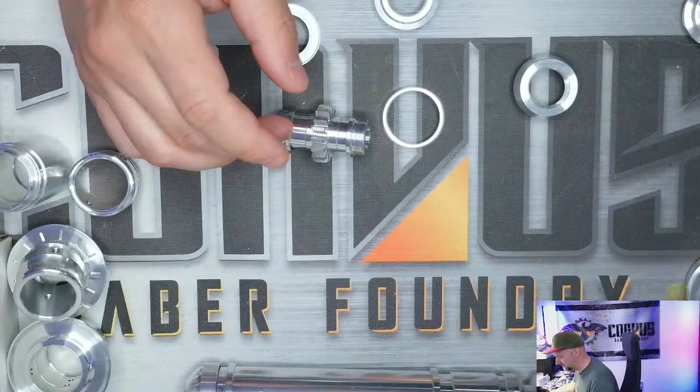So we got 5 new parts arriving in the next week or so that I talked about, and those parts are the wind vane insert. Gosh, I had a brain fart there, stop thinking for a second.

So just like all of the other thin neck inserts that we have, typical threading is about 6 millimeters, which is quite a bit more than competition at this point. It has this nice little torque chamfer, so it'll lock into place once you get it into the piece or into the item that you need it to be locked into.

And so the cool part that I really like about these wind vanes is that you can swap out the outer ring on the wind vane. I don't think there's a wind vane thin neck anywhere on the market right now that allows you to do this, unless you do something with the original and replace the actual wind vane cover itself, which is basically just a press fit item on this.

So if you don't know what this part is or what it's about, let me show you. Back in the day, I think World War One, potentially maybe even World War II, I'm not exactly sure, this part belonged to what's called a rifle grenade, and it fit on that part like this, then linked into this, and that fit on the back end of your grenade body piece basically.

And if you don't know why it's called a wind vane, it's because it actually was used to fin stabilize that grenade in flight. It actually put a spin on it. The wind vanes were tilted a little bit, so they put a spin on the grenade in flight so that it would stay stable and land on the target.

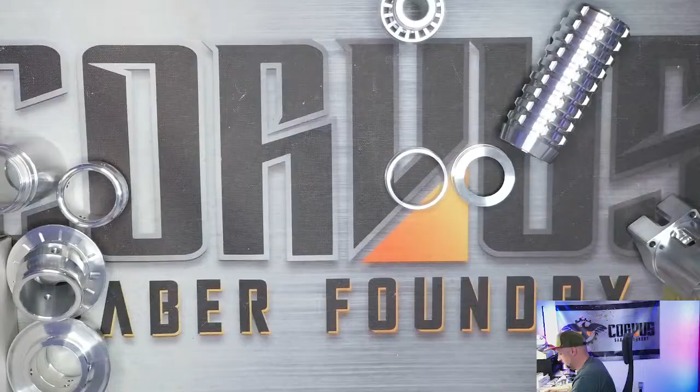I happen to have a body here that was building a sample for another customer with, and so what I'll do is I'll just put these pieces together here really quick and show you what I'm talking about, so you can get an idea. And I really like this Obi-Wan Kenobi base. It's one of my favorite parts because you can use it on both ends.

I don't have a second one to show you, so you'd have to imagine it. But if you wanted to put an Obi-Wan Kenobi base on the end of both ends of one of these, I don't think that it would look that bad. Let me get this locked in here really quick, so there's a decent look at it. Let me move these out of the way. If I can get it to focus, there it goes. I guess kind of focusing. But you can get your Obi-Wan Kenobi top and bottom.

It fits just like all the other ones. So we'll throw one on here. We'll put together really quick. I guess we can throw together something really quick. This isn't going to be the right size or shape probably, but you know what, let me swap this over. Let me change this from a female to a male end here, and we'll off to the races there.

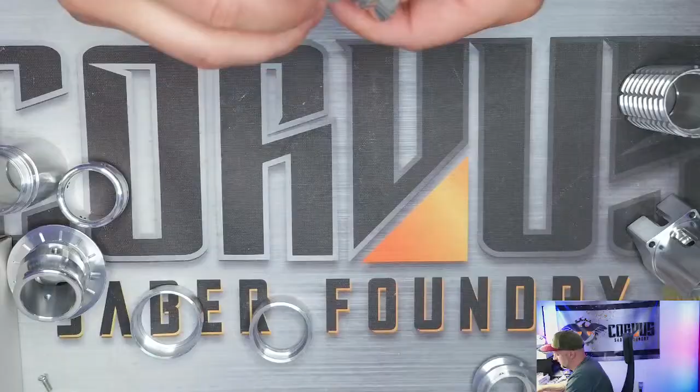I like that the other way around. So it wasn't supposed to be a let's build, it's supposed to be a let me show you my stuff and talk about these other things. But here, there we go. That looks pretty good.

If I could get the threads to start, golly. Ooh, little squeakiness there. There it is. Little decent example there with a thin neck on it. Pretty happy with that. And to show you that the shrouding works as it should. There you go.

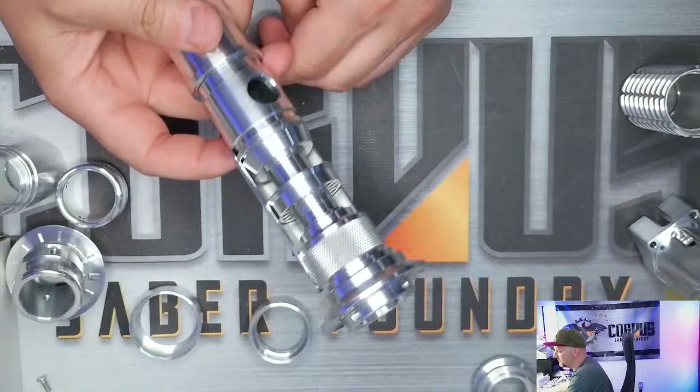I don't know how you would attach this now at this point, but if you were to glue it in or do something along those lines, that'd probably be the best case scenario in this situation. But you can put a shroud over top of the thin neck if you want to. You just have to figure out how to anchor it somewhere. So there's that. Not too shabby. I'm pretty proud of this one. I think that it's going to do a lot.

If you are inclined to keep this in a certain configuration, so if you buy one of these and you want to keep this ring in here, when you're torquing this thing around, it might cinch it down really tight or loosen it up while you're doing work with it. You could put a little dot of blue Loctite, the lowest level, on one of these threads, and just give it a little snug so that it locks in, and let it sit for like an hour so that it would lock up. And that way you won't loosen this up at all.

In order to remove that or get that off, you would have to heat it up just a little bit with something like a hair dryer. I've done this in the past, used a hair dryer before to heat up stuck parts and get them off. It works okay, not too bad.

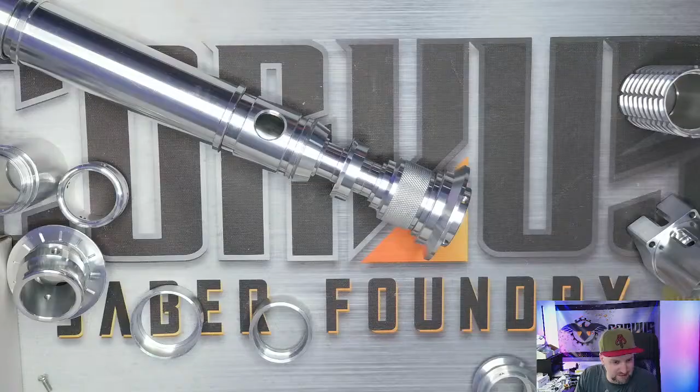I don't see any commentary or questions. I do see 2 people viewing. So hey, thank you for joining me and welcome, I appreciate your time and your energy in the chat. Oh, I saw a love and a heart. Oh, I love you guys too. Woo.

Cool, alright, let's talk about other things. Let me swipe this to the other place. Let's see, which way is it going to go? Is it this way or this way? I don't know. Yep, there you go. There's a swipe, alright.

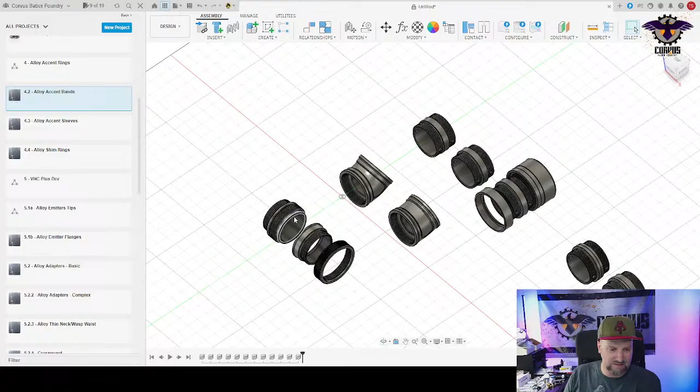We're in Autodesk now, we're going to talk about Fusion 360 and the stuff that we're talking about here. Along with the Wind Vane - oh there he is - and besides the Wind Vanes, we got this part coming here, and this part here is the infinite adapter.

If you haven't heard me talk about this, I feel like you should have at this point because I've been saying a lot about it. One of the things that's been plaguing us as builders in VHC is being stuck having to clock our parts with threads that feel like they're a mile long - like 14 turns, right? If you turn half a turn with a hand, it's like 14 turns. It might not be that many, it's like 10 or 12 maybe, but it's a lot of threads.

I'm sorry John, I saw you said the thin neck build is awesome, I appreciate that. But the threads on all of these parts - this thread up here is like 7 millimeters or 6 millimeters of thread that you have to get through. And the part only moves like 1 millimeter in for every turn. So a 29 by 1 thread pitch means it's taking its time moving in, and it takes forever to get in there. It's something that's been bothering us, plaguing us for a long time.

Most people, when they need to clock something, either use timing shims, which is cool, but those things suck. The other option is to shave your parts down - sometimes you only need a fraction of a turn, so you have to lap your parts in a figure 8 on sandpaper to reduce the threading on both ends. That is not a perfect science, it's not precise, it's honestly kind of frustrating and irritating to have to do that.

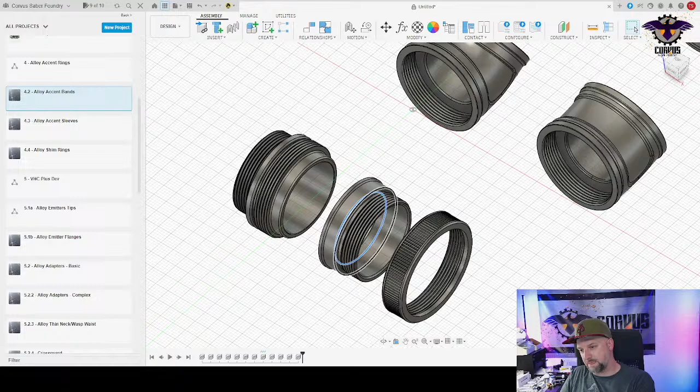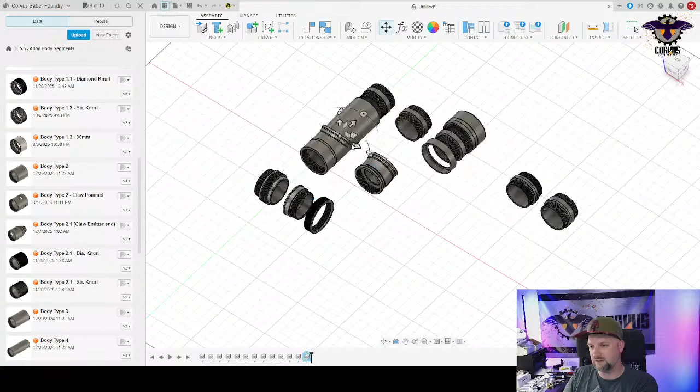So, infinite adapter. Let's talk about it. I don't know that many people really know how this is supposed to work, or what it is. I've talked to people who say they have to see it in use to make sure they understand it. So I'm going to do a quick demonstration of what this is supposed to be, and I'll leave it to you guys to pass judgment on what you think it's going to be like. I've got to grab a part out here really fast.

I think it's important to show it like this. Normally I have my parts oriented on this east to west register. I'm changing it to east to west with a southwest point, to hopefully shed light on the shape and how this is supposed to work.

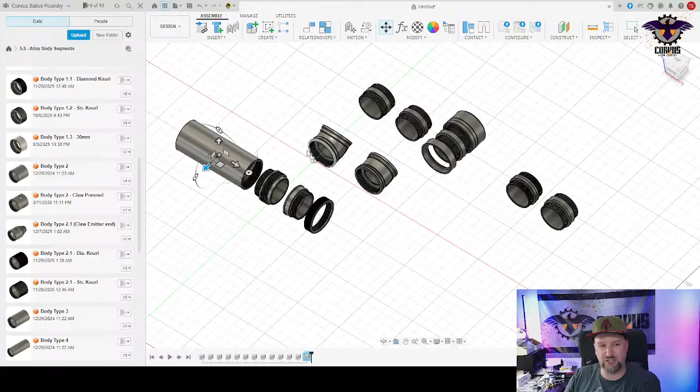So anyways, the infinite adapter is composed of 3 pieces: this lower piece, which I'm calling the infinite base; this upper piece, which I'm calling the infinite swivel; and then this additional third piece, called the infinite collar. That collar is the really cool part of this. Let me show you how this piece works.

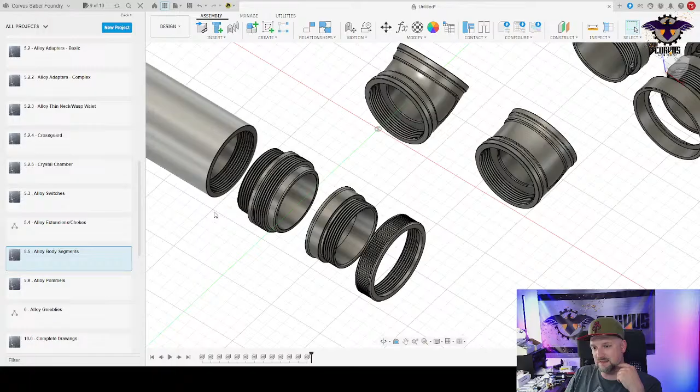Let's see if I can get this whole thing to move, I gotta get all this piece out here. Okay, so the infinite base threads into your components just like any other piece would. You stick it in, thread it, and lock it into your parts just like that. It should fit normally, the same way. It still has the 2.5 millimeter end on it that allows you to put accent rings and accent bands, whatever you might want to put on there.

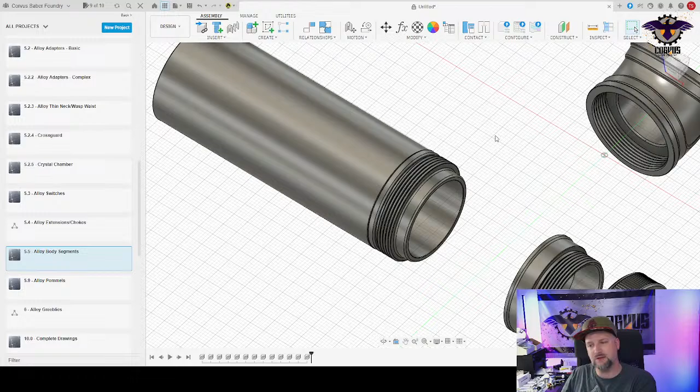It basically just gives you the gap to be able to do additional design work or pretty stuff, if you want it. You don't have to.

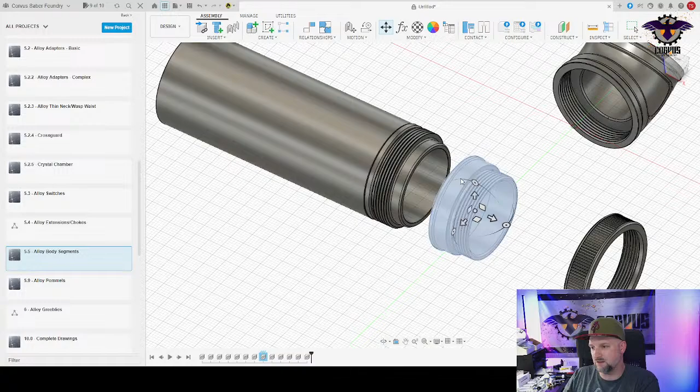The second element of this is the swivel. I'll go ahead and grab that and drag it over here. It's really important to pay attention to this piece right here, these 2 parts, because there's a nested zone inside of this that anchors over top of this band. Let me get the swivel here and drag it over top of it to show you what that looks like.

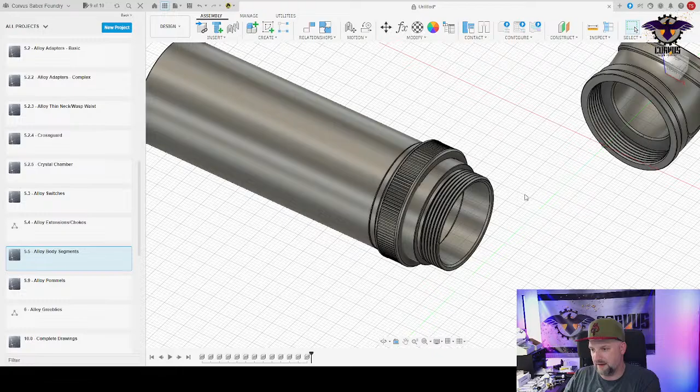That nests over top just like so, and you can see there's a larger thread pattern on here that is going to interact with something, and that is the collar. So what happens is this collar will slide over top of those components and thread on just like that. When you thread that on, it's going to lock down the entirety of this swivel. It's not going to be able to move. That's going to hold it in place.

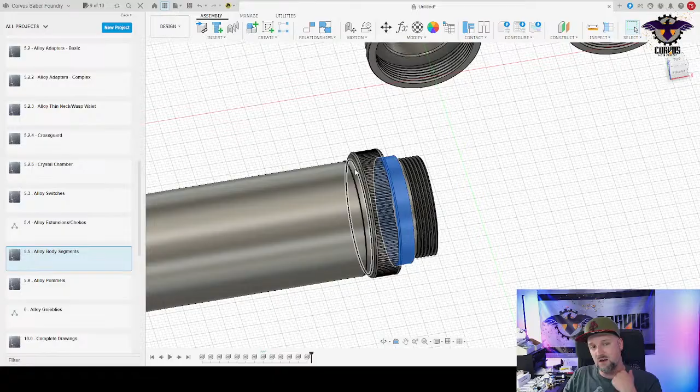Now what that means is you thread that swivel into the component that you want to link to, or use on the top side of your Saber. It could be an emitter, or another body component, something like that. But essentially the idea was to use this close to your emitter side so that you can clock your emitter in whatever way that you want.

It's not perfect, but it is reminiscent of the accent rings that I have. So this is an accent ring shape. It's basically the same exact diameter, now that I look at it - 36.15, so 36 and an eighth or so.

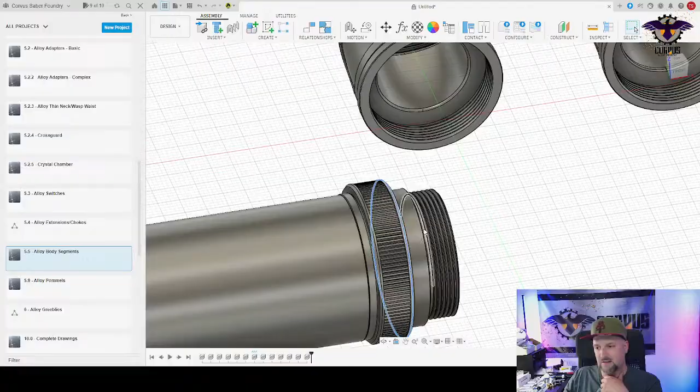But in order for this to work appropriately, let me see if I can grab something here. Let me see if I can find... I just need a body component, a body segment. I'm going to grab out the knurled body segment because you'll see it move. This is important.

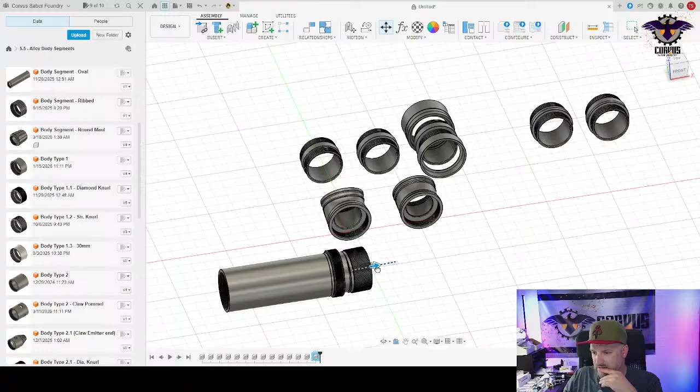So essentially what's going to happen is this body segment is going to fit to this component just like that. There it is, it's going to fit to that component just like that. And when I loosen this collar, like this, I'm going to turn that loose. That's going to free both the swivel and the components above it.

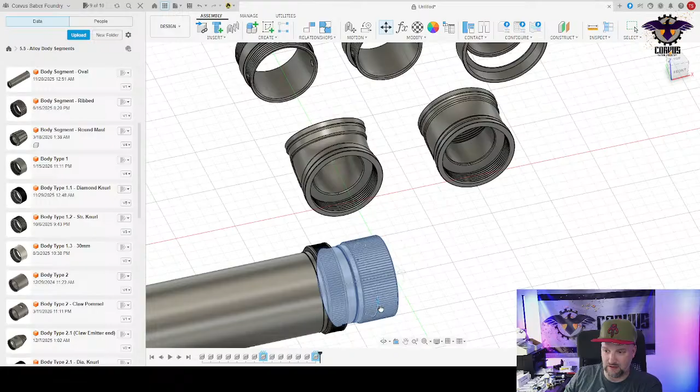So these pieces, if I can get them selected, are now free to pivot around the axis, kind of like the focus on a camera, that ring, right? So that will allow you to be able to adjust this in any direction about the axis of this part. And that way you can basically infinitesimally clock your emitter wherever you want to go.

And so the intent is there, depending on the sales and function of this kit - if people like it and end up using it, I can make more of these rings, and I can even make them a little bit smaller.

They're 36 and change. The thread on this, I believe, is 33. I'd have to double check it and see what it is. I think it's 33, it might even be 30. But I can make that ring a little bit smaller, or a little bit bigger. It just depends on what people want.

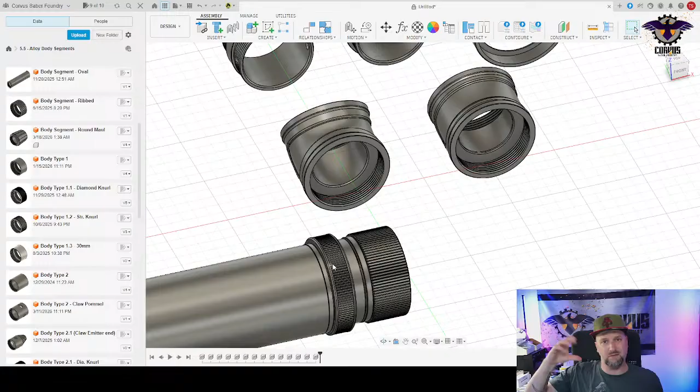But the idea is that if you're holding your saber down here on this component, you can loosen the ring up, pivot your upper assembly, and then lock that ring back down. Now you have a saber that's correctly clocked in the position that you want it to be in.

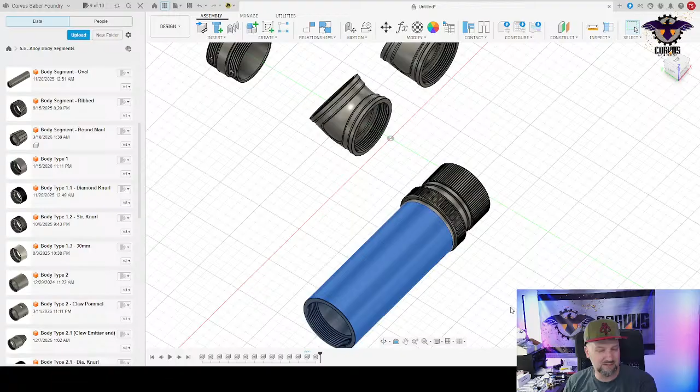I can't think of anybody else that's done something like this on the market yet, so I'm trying to be among the first to make that happen. I think it's going to be really cool. It does have a little bit of height to it, but the cool thing is I've got some other components over here.

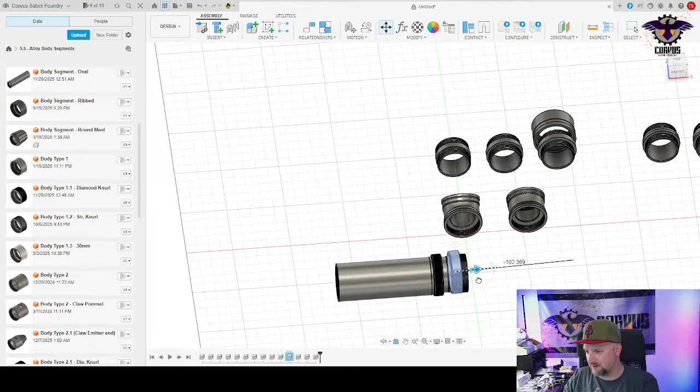I just happen to have an accent ring out and available for play, and so you can stick an accent ring on basically all of these pieces. I'm going to flip it around the other way, 180 degrees. You basically put an accent ring on any of these ends that you want. This isn't a perfect fit -- man, I really screwed that up, didn't I? I guess that's close enough.

If you want to put another accent ring on it, you can. If you want to put an accent sleeve, when more accent sleeves come online, you can put an accent sleeve on that end, or on that end. You can basically make this as bulked up or thinned out as you want for the execution of whatever you want to do on your lightsaber.

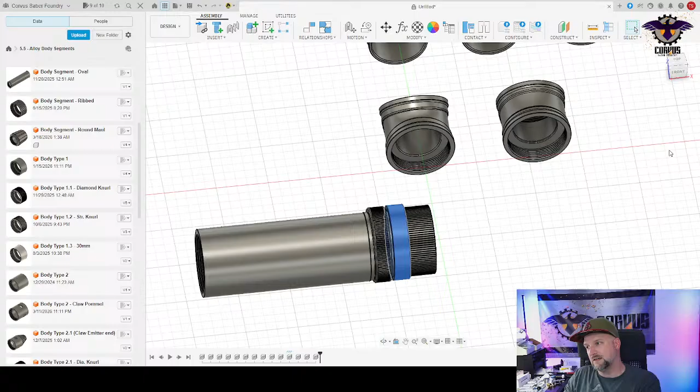So my hope is that people will use it and find it useful. If you don't, that's okay too. Not that worried about it.

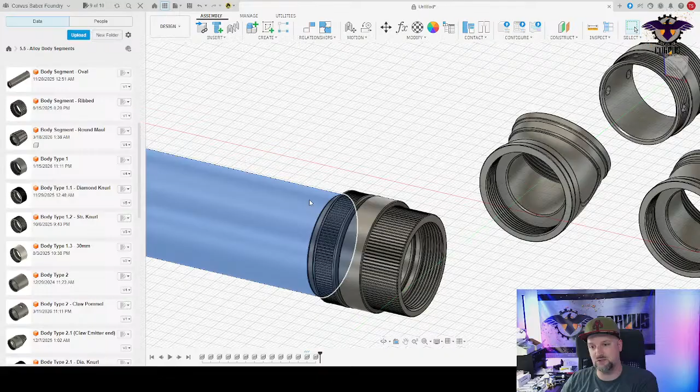I have another version of it that I would like to do that is also the same diameter as this, but it would be treated more like a thin neck or a hybrid adapter, in the sense that you'd be able to adjust those, but it also would be a little bit more fiddly because it would have screws on the inside of it that you'd have to use. Anyways, standby one.

I'll be able to play with it. I'll show you guys some builds with it, with the parts that I have on hand, and hopefully you'll get an idea on what it's capable of. My hope is that it will work correctly the first time like I designed it. If it doesn't, I'm in trouble.

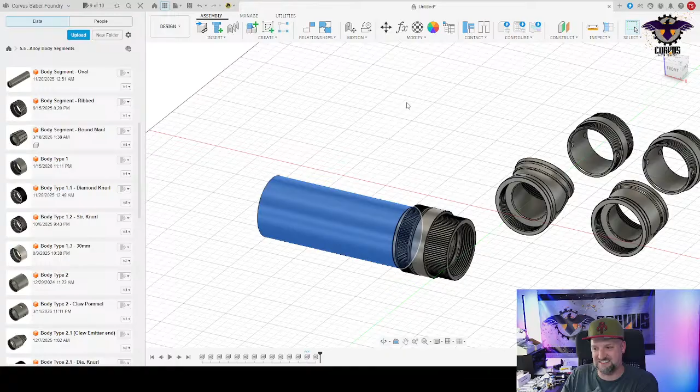I'm just kidding. I think I may have to do some minor edits to it, to push the inner portion of that out just a little bit farther, so that it has more of a sleeve to sit on top of, to lock into. But we'll see what happens, how that works out, and we'll get her done, we'll get it sorted out. It's still in dev, so it's coming along, right?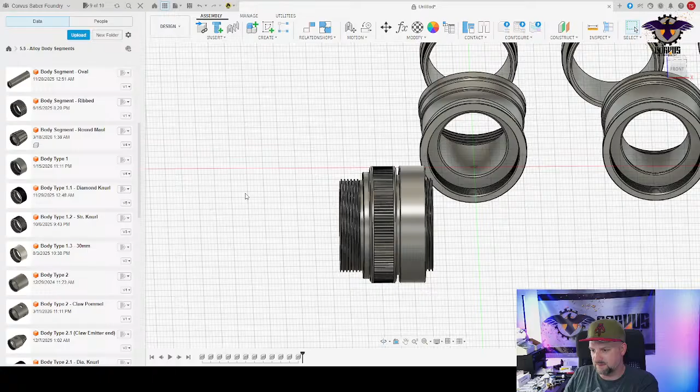Let me get these infinite adapter elements out of here really quick. We don't need those anymore. We'll go ahead and talk about this.

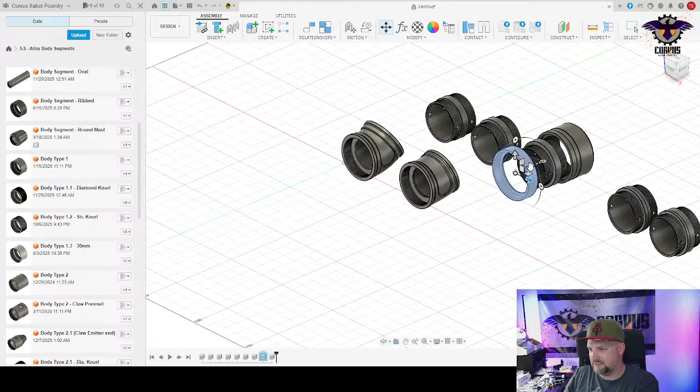All right, so I got good news and bad news. I don't know if you guys are on or you want to talk about it, but the bad news is the curves and bends have been postponed, and the reason why is it's just ridiculously expensive no matter which way I slice it to build these bends. I don't want to say postponed permanently or indefinitely -- they're just postponed temporarily, and that's for me to figure out how I want to fund it, because the way and the expense I'm dealing with right now, it's just out of reach to be able to fund them personally out of pocket.

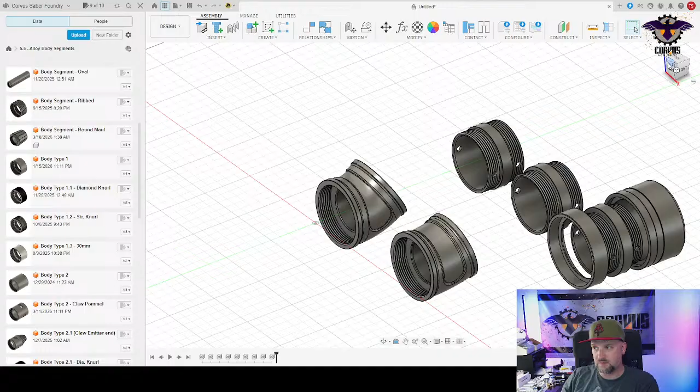I guess we'll see how each of these adapters land, the Infinite and the Obi-Wan Kenobi thing, before I start making a decision on which direction I want to take this. But the bend parts, which you're looking at here, is the final drawing or the final edit of these components, which I like a lot better. I think they look a lot cooler than what I had previously made, which is basically just a straight, simple bend.

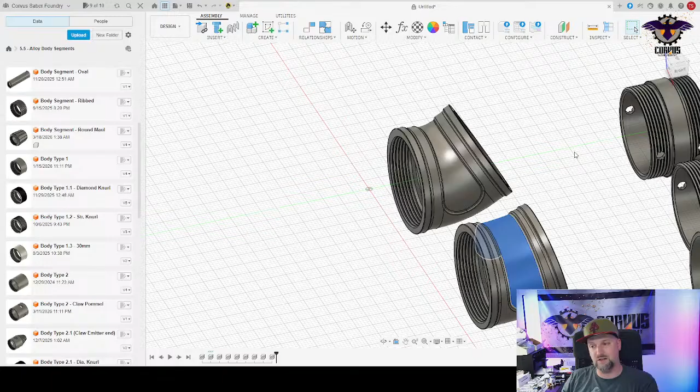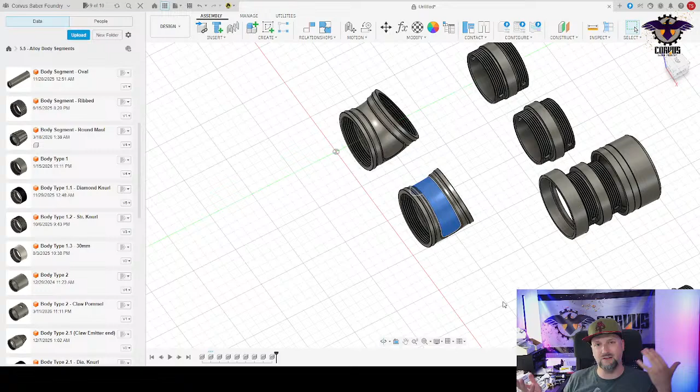They kind of have this neat Count Dooku style embellishment in the middle of them, and I feel like they would be pretty comfortable to use if you were swinging them around playing lightsabers with them. I submitted these two pieces together along with a third component, which was a mechanical adapter. I thought they came out kind of cool, but the problem was the mechanical adapter looked like it had been dragged along the floor of the factory, and it didn't fill in correctly. It didn't look that good, and that kind of sucks. I'm really sad about that, because I thought it could have been way better.

Either way, the factory that I was talking to, they were not happy that I told them their parts sucked, and so they said they would remake them. So they remade them, they're actually shipped, they're in shipment to me right now, so I'll have another version of these. But basically the threading on them was so bad I could barely use them with any of my parts, much less give it to you guys as something to be produced as a production item.

And so I was just frustrated with it, and so I decided to take these drawings back to my original factory and talk to them. They said that their price is basically going to be the same as their original price for the original set of parts that I had drawn. So they're not terrible, but they're just a little out of reach, and they want a large purchase at one go for a single part. Instead of the normal 100 parts that I order, they want like 200 parts, which is a lot more than I want to shell out initially for a set of parts. That's just a ridiculously large amount of money.

So I'm looking at options, and the options are: we do a pre-order. I've never done a pre-order before. I have pre-order software set up on the website to be able to handle pre-orders and get them prepped. But the downfall is that when somebody makes a pre-order on the website, it counts really badly against my time to fulfill, and so I have to defer them for a period of time until I can get them fulfilled.

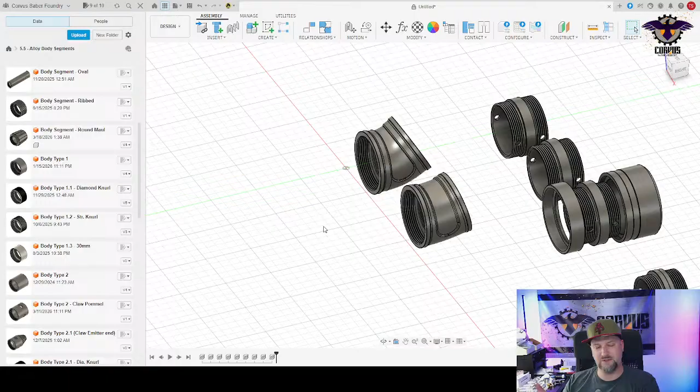And, I'm tipping my hand to my competition that decides to come and watch my videos, but I'm beginning to understand. I think that there's a reason why nobody has any other curved parts besides the 45, because it's just too expensive to make curved parts, either from CNC or other manufacturing processes. The manufacturing process to 3D print them is just not there to get good high quality prints, and prints that have good high quality cut threads. So I'm not really happy with all of those answers.

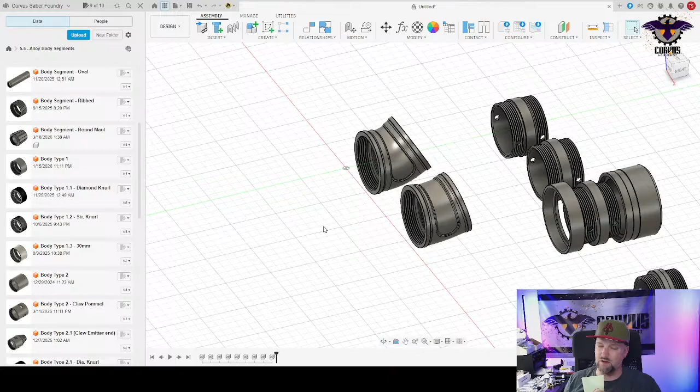I guess we'll figure it out in just a little bit. Man, the tea's going down good tonight.

All right, enough talk about the bends. That kind of sting. Actually, they need to stick around. That one's the original, I think the original item, maybe. Let's unground that from the parent here. We'll get rid of these dudes.

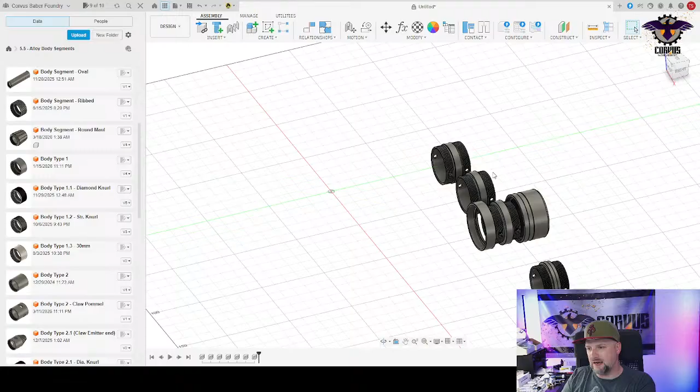Nice. All right, so for everybody that's still around and listening here, there is one more set of parts that I put together and threw in. And you can kind of see them here. It's a 5-pack of adapters. And if there's one thing you should know about me, is that I love adapters. I love adapting things to the lightsabers, and I like using these adapters as areas of interest on the lightsaber.

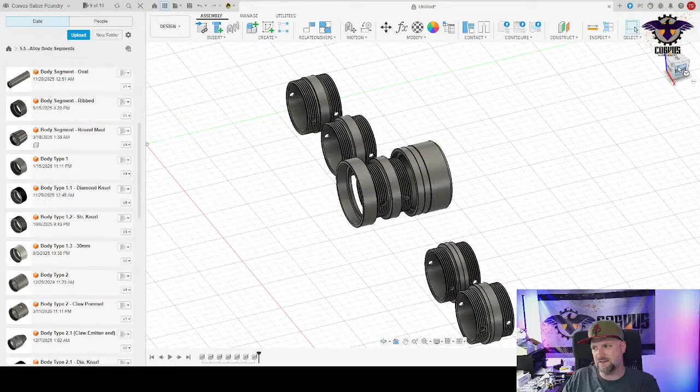And so on the top end of your screen, there are adapters that are 30, 31.5, and 33. And the length of the land space there is 5.5 millimeters. Why 5.5, you ask? I don't know, I just didn't want to do 5 exactly. But the cool part about these is, and I think they're going to be really useful for this particular bit, is putting them in between.

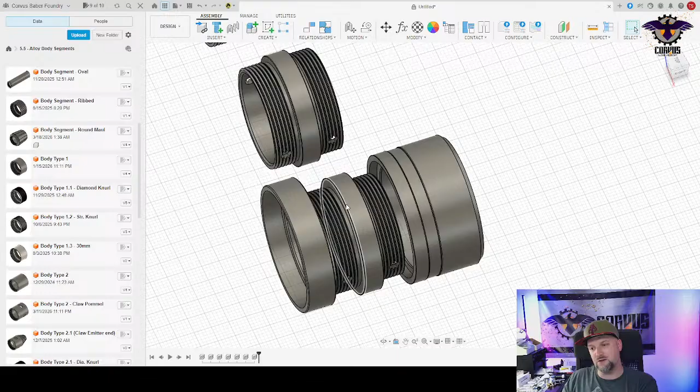There have been a bunch of times where I was building over here on my desk, and I said to myself, damn, I need an adapter that's just a little bit longer. I need one that's long enough that I can get two of my accent pieces together to make a really cool shape. And so that's what this 5.5 millimeter adapter is supposed to be.

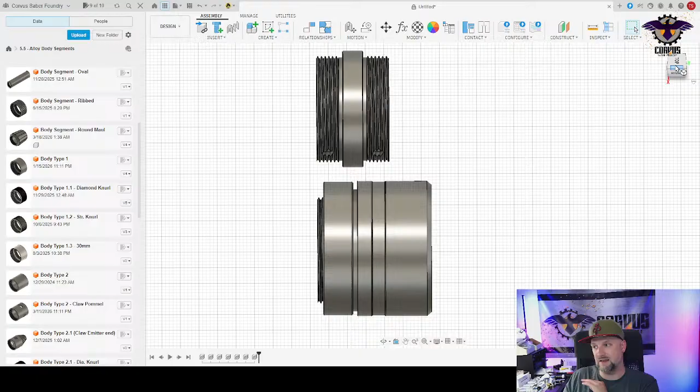It's supposed to allow you to fit these other accent pieces together with just a little tiny gap in between them. There will be other ones later on as I do more of these adapters. You'd be able to fit these together with like a 0.5 millimeter gap, or maybe 1.5 millimeters, a very tiny gap. So it gives the appearance of depth and allows you to do more work with the same type of parts you have on hand.

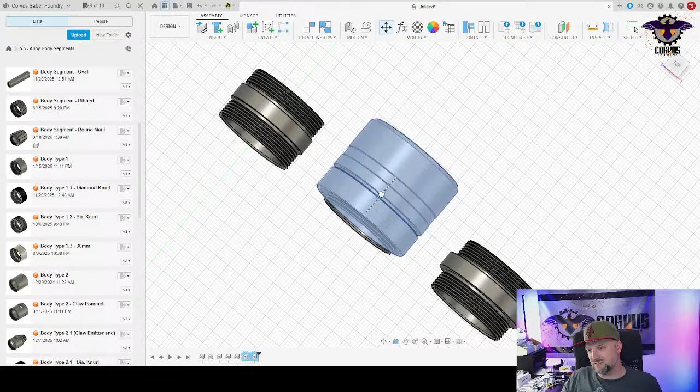And so you can have these available in this 31 millimeter as well as the 30 millimeter, so you can get even more depth to those parts. I'm going to try to move these two together. Yeah, that looks good. So you can see how deeply those go. Obviously, you need to have a 33 millimeter part on either side of this when you put your parts together, because if you don't, these components will not fit very well on this adapter underneath. They'll slide kind of around on it. So you need to have a 33 millimeter part on one side or the other to register it so that it will work.

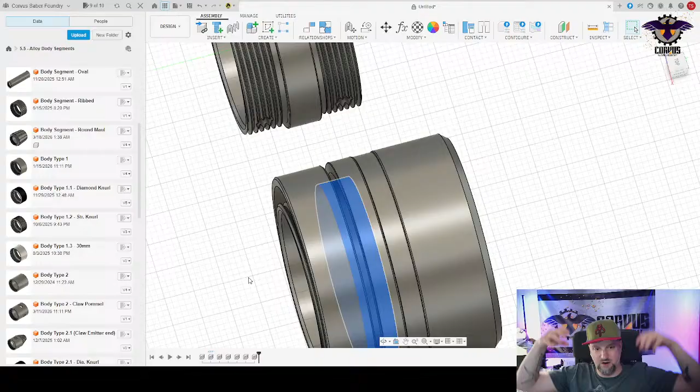And now, obviously, if I move this up here to this side, you'll have an even deeper well in between there, so it gives a heavy depth of deepness in between those components, and I think that's going to look really, really cool once we start seeing them in builds. It's just another thing that's going to expand. And excuse me, I didn't mean to cough on you there.

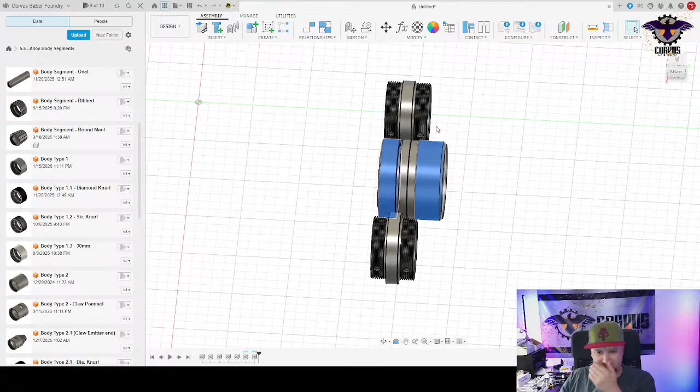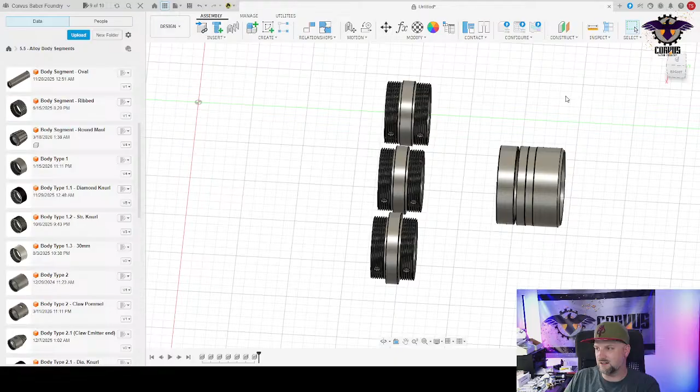I was outside in the elements today going troll hunting. If you guys don't know, there's an artist named Thomas Dambo who makes trolls out of recycled wood and puts them in a bunch of cool places. They recently put about four of them in my area, so my family and I went today to go explore those things. We saw the trolls in our area, and I got a nice dose of pollen while I was at it. So my throat is not happy. It's busy.

The important piece here I want to show you is this. I'll show you... let's see here. Let me grab this body. I'm trying to find a body component that I want to get out here. I'll grab a type 2 and a type 1 just to give you a hint at what this could be.

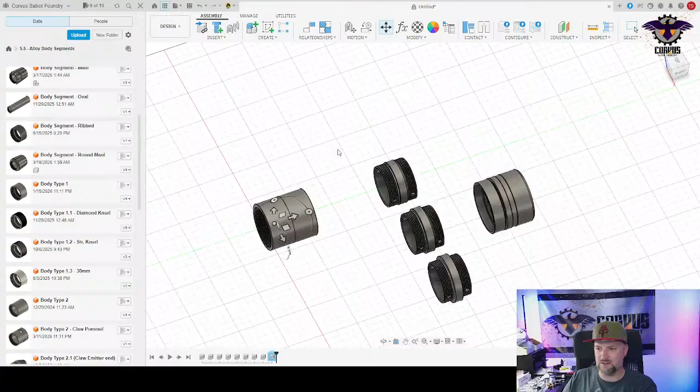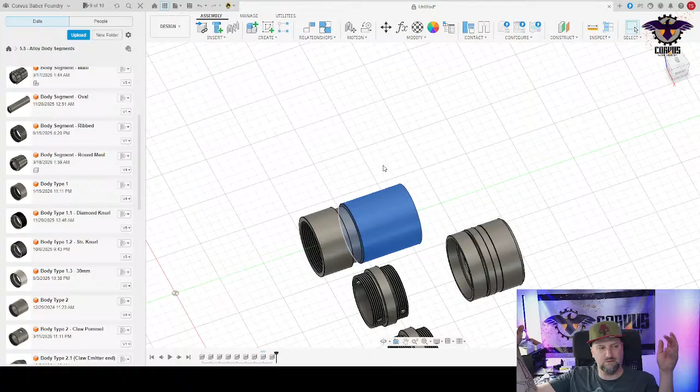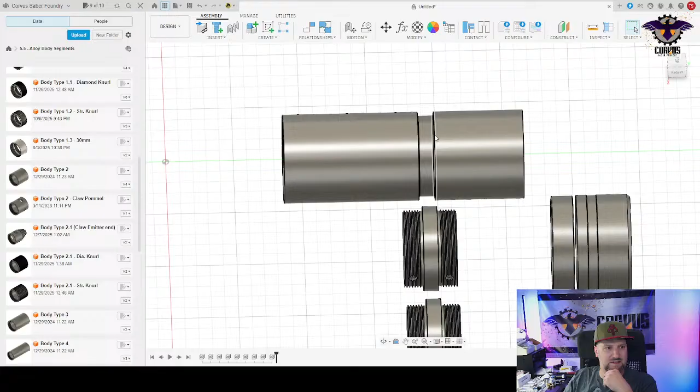So one of the things I really wanted to see was the ability to build a body component out of multiple pieces with that sort of depth I've been talking about in between parts, right? So if you use some imagination, you can think of this as a lower grip component and an upper grip component. It could go long like a 4 or even a 5, or you could do a type 3 on this end. You could drop a type 3 in this space and make a body component that's just a little bit accented, where you end up having this gap or dip in between.

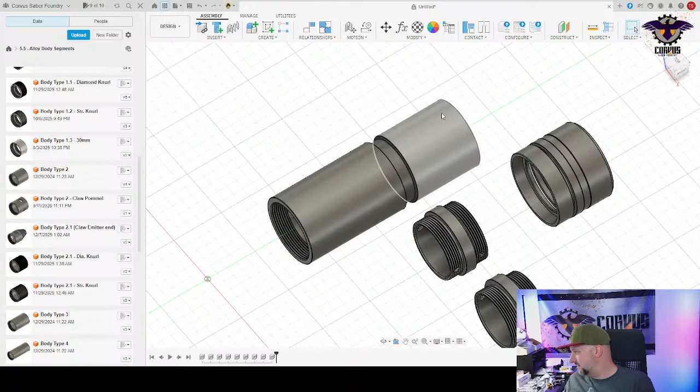This is really what I made the adapter sets for in the first place, to be able to build this kind of layered, scaled grip section, or these grip elements, or even body elements. You could put two or three of these together and make a body element that's kind of unique. It's plain, but pretty unique in the sense that it has these divisions inside of it in different places, and you can put those wherever you want to. You're not stuck with the shapes that these other companies are making for you. You get the opportunity to build them all yourself. So I really like that kind of thought process with these. I think these are going to be good.

And again, if I show you my basic adapter sets here, I have another round of these that are prepared. Whoops, they're right there. I've got another round of these that are prepared. Here's the type 0.

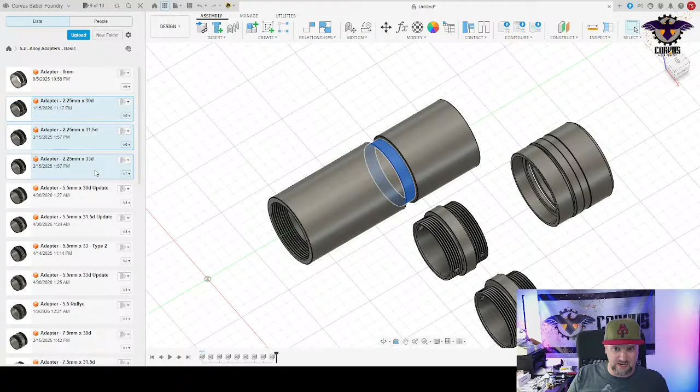Here's the type 1s, A, B, and C that you see. Here's the type 5 - these are going to be 5s, or 6 maybe. I think I've already got a type 5 up there. Yeah, I've got a type 5 already. Dang it, this was a really good opportunity to have this as a type 5. These will end up being like the type 6 or something along those lines. And then there's also some 7.5 millimeters down here as well.

So you can start expanding these beyond. There's a 31, a 30, a 33 - excuse me, a 30, 31, 33 in the 7.5, and then there's a 10 millimeters. They go up, they keep going up. So I have a lot more of these built so that we can use them for other things going forward in the future.

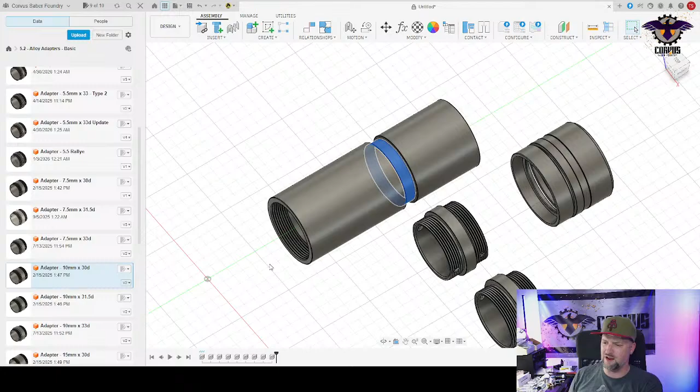I don't think I'm going to be on much longer. This was kind of just a perfunctory, let's get this done - I need to show you what's going on in the CAD type of thing. I don't know if my voice is going to hold out much longer.

All right, so I gave you the rundown on those 3 products here. We'll go ahead and look at the next piece, which are these 2 other elements. So if you guys remember way back, you've got to go back in the Wayback Machine.

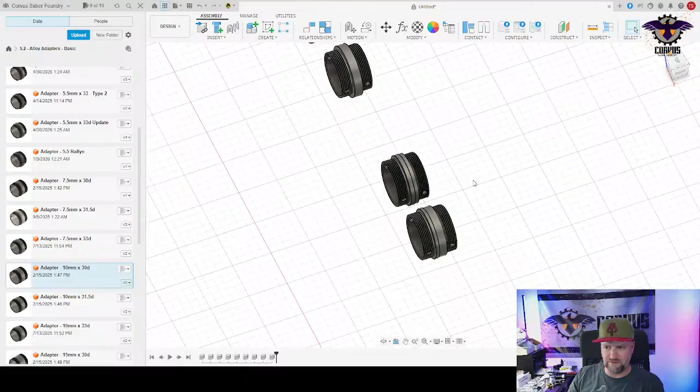I created the very first adapter, which was the type 1, and it ended up becoming the type 2 after I produced the type 1s. I'm not going to do a name change again, I'm just going to keep trucking on with the numbers, but these were the original iteration - not this one here was the original iteration of that, what was the type 2. So this is just a 2-step ring, and then this is the same 2-step ring with a slightly longer top.

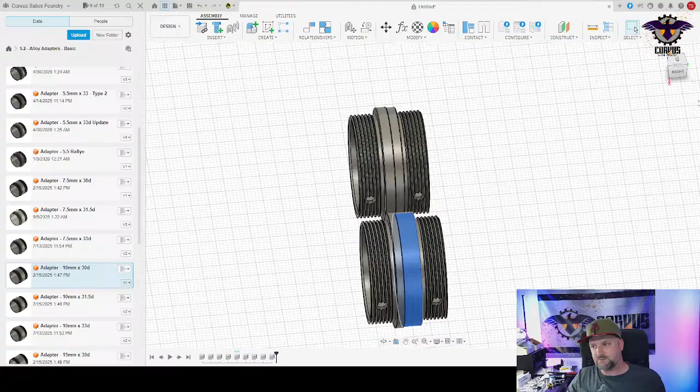Man, I am not hanging on worth a dang tonight. This is the same ring with a slightly longer top end to it. So the intent here is that they're pretty darn close to the same shapes and structures that we normally are used to - 2 1/4 there, not quite 2 1/4 on that one.

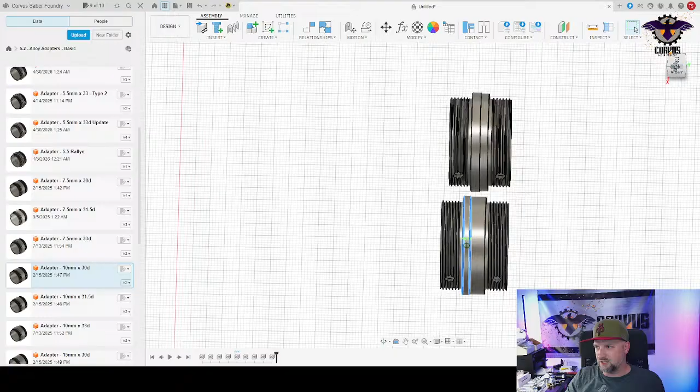And then these are just going to kind of be extra complement adapters to come along with this. Think of it as like a fallback plan for the parts that fall through the gaps, and I don't have a week or a month to submit something. I just need to have some parts available, and I need them to be good additions to the spaces that we're working in. And so I made these up.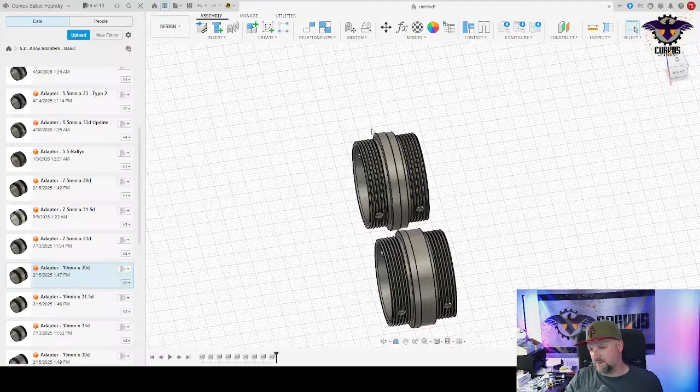Again, these are not - let's see here - they're not my, I guess, not my first choice of parts, but they're going to be decent. I think that they're good showings. I think that they fit the same models that we've been using for quite a while.

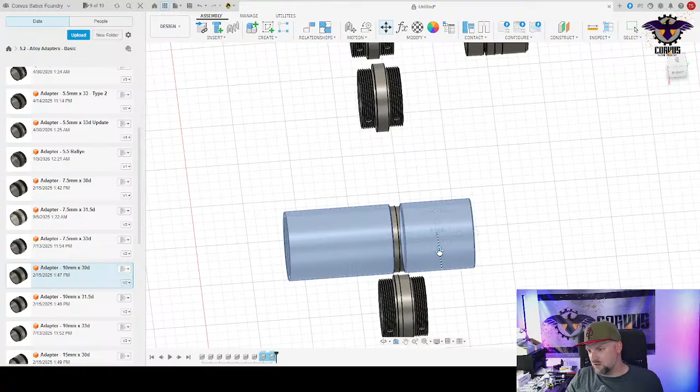Gosh darn it, get out of here. All right, let's grab this and move it down here, just to give you a gee whiz on what it would look like against some of these parts. The one that this is currently on, it is a 32 millimeter component.

So if I click there, you'll see it in the lower - well, you can't see it because my head's in the way - but it's a 32 millimeter adapter. It's not a 33 millimeter adapter, so keep that in mind when it comes out. I'll make sure I put it in the parts listing so that you know what these are.

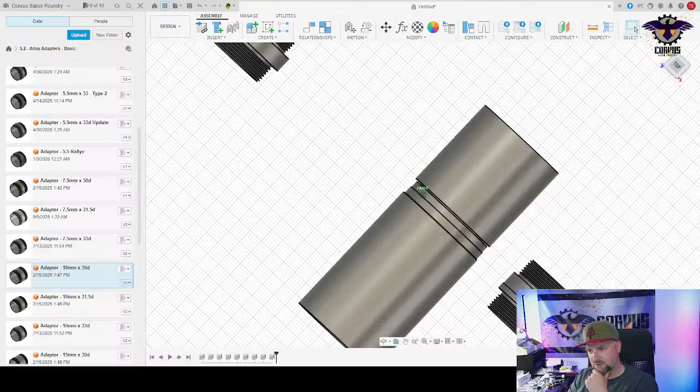Again, really, really simple, but something that adds a whole lot of style. Oh my God, I'm gonna have to call it off.

Something that's really simple but adds a whole lot of style, just like the Type 2. It's one of my favorite looks - it's just that nice transition between a part. Steps up, steps down, allows it to move through.

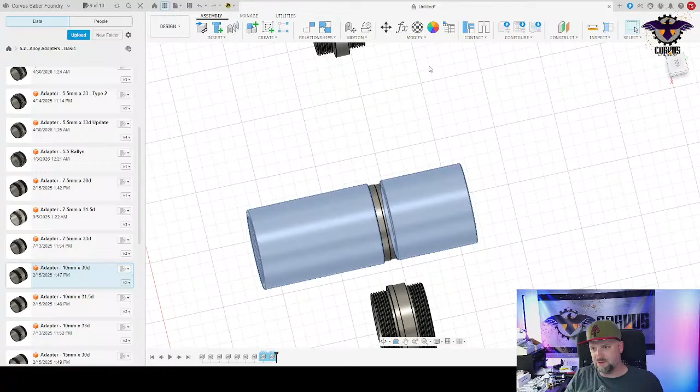What we'll do is we'll move these two Type 3s over as well. Man, the air conditioner started running in here, and my throat is just not having it today.

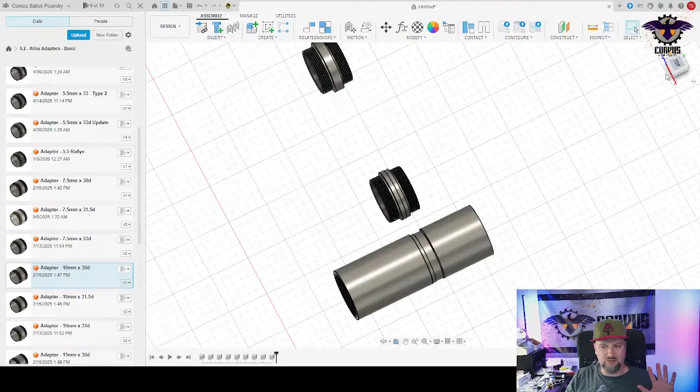Let me drop this down just a little bit. Boom, yep, and up, okay, there we go. So you can kind of see really simple, super simple designs, super easy to work with, just like all the other bits and bobs that we've got.

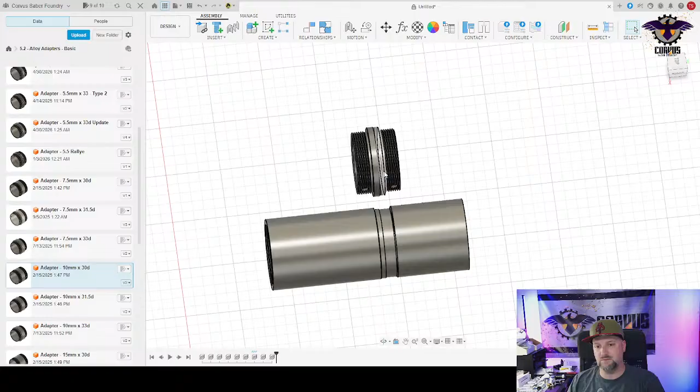That's also a 32 millimeter component. So if you use any sort of little adapters or accent rings or caps or something, they need to register against those parts. But really, I kind of thought of these as like standalone elements. You could put these on their own inside of a build, and they could stand just as strong as any other component on that build, because they are just accent pieces that add new shapes to those structures.

So really excited about having these.

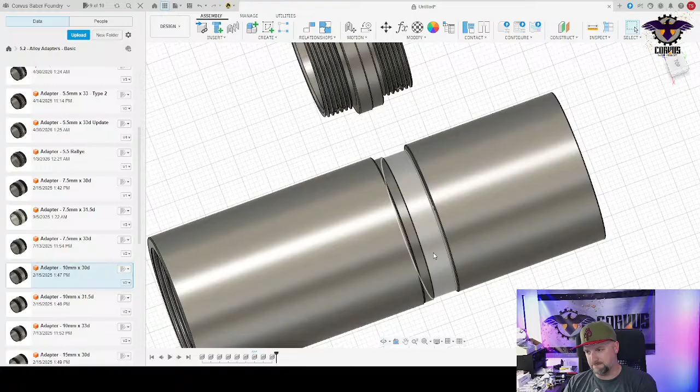Really happy about having these available to allow them to be used and stuck into builds. I think they're going to be nice additions. They aren't quite the 33 millimeter diameter, but if you treat them as standalones, they can be really, really useful.

So we went over a lot of stuff tonight. I'm going to come back to the top and talk about what all these things are. I lost my piece of paper, where did it go? Nope, that's the paper.

So, discuss the wind vane. That thing is going to be coming in the next week or so, probably the top of June. At this point, the bends and mechanical adapter are kind of on hold until I get that whole process figured out. The infinite adapter sample is coming with this next round. These adapters, these 5 adapters actually, are all going to be showing up at the same time as part of the same package, because they were submitted at the same time, and they were done as a rapid thing, because I've gotten pretty confident with my factory's capability to produce these parts. So they were done, they should be here.

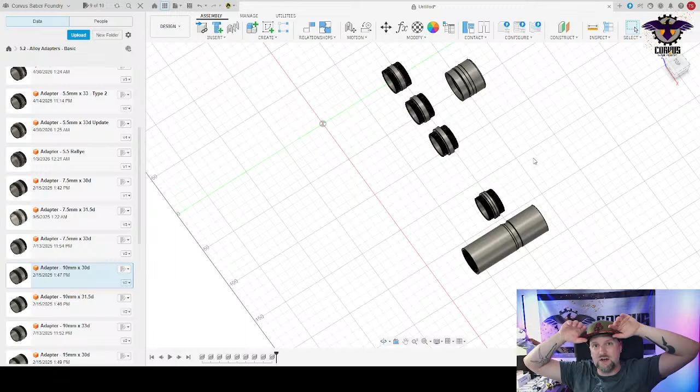I would wager they're going to be done in the next probably 2 weeks or so. I would bet. I'm going to ask the question of them and find out where they're at, gotta find out from the factory where they're at in that step.

Some of you guys might be asking, like, what's coming next? To be honest with you, I haven't exhausted everything, all the tricks of the bag this year. But stuff that's on my list of things to get done this year are accent sleeves, because we haven't had a new accent development in probably over a year at this point. We need something new to punch it up and vitalize it. I had gotten some quotes previously that were pretty expensive, and so if the next set of parts all does pretty well and it kind of snowballs into something bigger, then we'll start looking towards those accent sleeves as well.

As other items. And then another set of pieces that I'm looking at are switches. If you guys know me, I've been talking about this for a long time. I don't like the AV switches. I know that people do. I just am not a big fan of them. I think that they lose a little bit of verisimilitude, like my immersion with interaction with my sabers and seeing other people use them. And so my goal has been for a long time to hide them. So I'm working on a set of switches.

Working on a set of switches that are tactile, or tactile replacements, which basically will cover up the AV switches, and use like a tactile plunger that will go through the Saber body, through the switch body, into that space. So more to come on that.

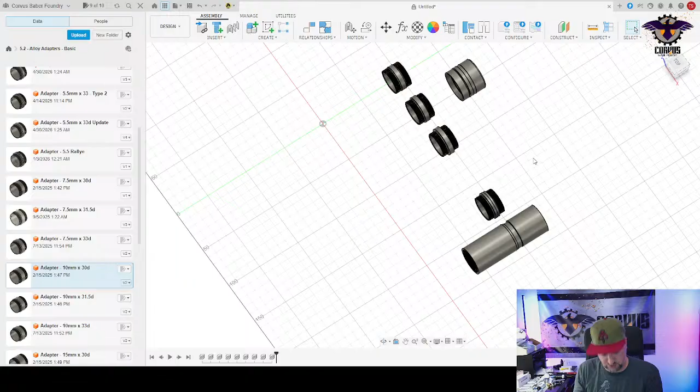That might be another discussion, and if you go back a couple of Corvus casts, you might see it. I've talked about it a couple times, explained it, what it is and what it does, how it works. And I got people kind of on my back too, asking questions about how to make cores for something like that. So it's up in the air.

Got all the junk at the bottom of my tea. Delicious.

Anyways, I really would like to keep going on this cast, but my voice is not letting me continue the discussion. I am coughing a lot, and it is quite irritated.

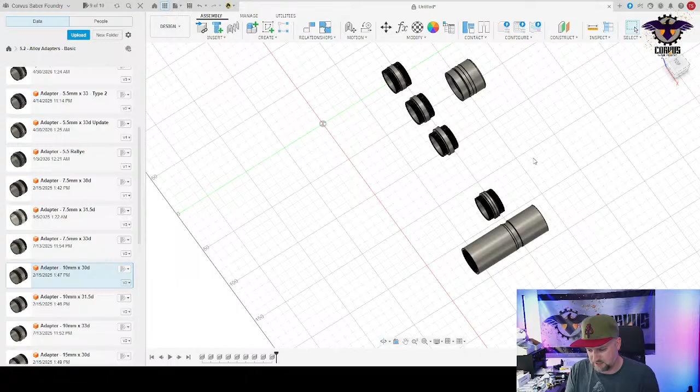So I'm actually going to leave you guys with this. This is what we built earlier today. We put together this thin neck build relatively quickly using the new wind vane components. Just a really simple build. So there's 5 new components coming with that, and they'll be here in about a week. I'm really looking forward to getting them launched.